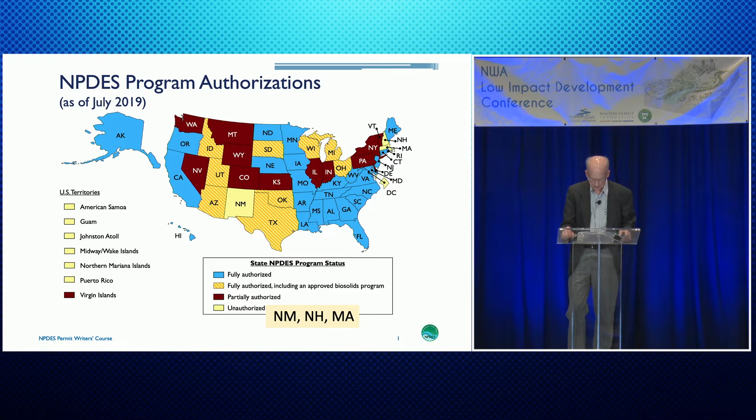Tennessee, we got our authority in late '77, as I said. Some people were ahead of us. The bulk of people were behind. I really don't know when you guys got your authorization. But the status is now that all but 3 states are authorized. Idaho is the most recent state to be authorized, and they're still in the ramp up of their transfer. And Tennessee got our authorization for the same reason that most states did, and that was to keep EPA out. It's the reason that business and municipalities wanted the states to do it, so that EPA would not implement the 402 Clean Water Program.

So here's what the MS4s in our area look like, and these are a lot of the cities that I heard you mention yesterday. Now it says Northwest Arkansas Municipal Separate Storm Sewer System. But then you see the University of Arkansas is listed down there. So even though the word is municipal, the definition is if it's owned by the government and it has a drainage system, then it's an MS4. And so in Tennessee, the University of Tennessee is an MS4. Vanderbilt University is not owned by the government. It's not an MS4. And the University of Tennessee is called a non-traditional MS4. So they've all got to have permits to discharge stormwater.

And Arkansas does that the same way every other state does, by issuance of a general permit. And think of a general permit as like an umbrella. You've got to get out of the rain. And you can either bring your own umbrella, work it out, or you can write to Arkansas and say, I intend to be covered under your permit. This is my notice of intent to be covered under the general permit that you've issued. And if they do that, Arkansas requires, as all states do, that they develop and enforce a program. They have an ordinance or authority to require them to achieve the 2 objectives we mentioned earlier: only stormwater in the storm sewer system, and that stormwater will be controlled to the maximum extent practicable. They've got to have authority to do that.

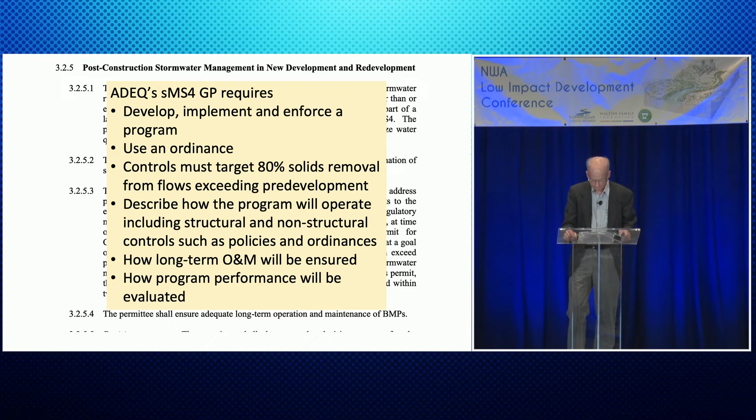If that happens, we've reversed ourselves on our commitment that we made yesterday to make friends with stormwater, to manage it in a way that it doesn't present a risk to public safety and health. And so that's where we're going. How can we do that? This slide says it's on us to do what we said that we would do.

MS4s say when they send in their stormwater management program, here's how I will do things. Almost invariably, they say, we will require property owners to maintain post-construction stormwater control measures. We're using the term SCM now instead of BMP because the B in BMP was offensive to some folks. The best, you can't make me do the best. I'll do a pretty good job, but everybody can't be the best, so we're sort of phasing out of that. But stormwater control measures have to be maintained.

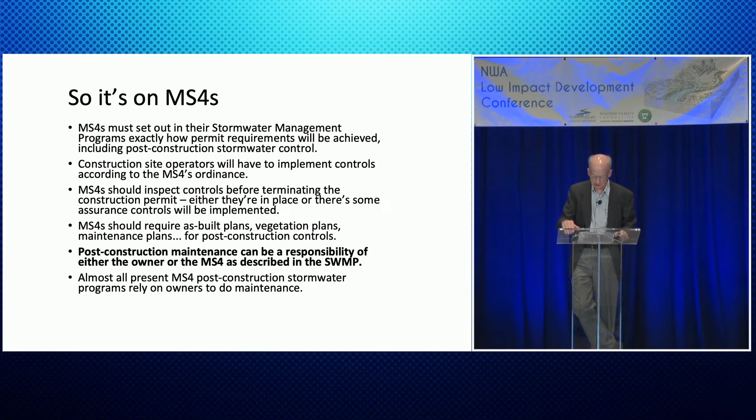MS4s say how they're going to do it, and almost invariably they say, well, we're going to have the property owner do it. The property owner is going to do inspections, and they're going to find out if they've got any problems, and they're going to fix those problems, and they're going to let us know that they've done it, and we'll put them on a list saying that that's been taken care of. This is some of the controls that we talked about yesterday, and they're the same sort of controls that we're talking about when we say how are you going to maintain these controls.

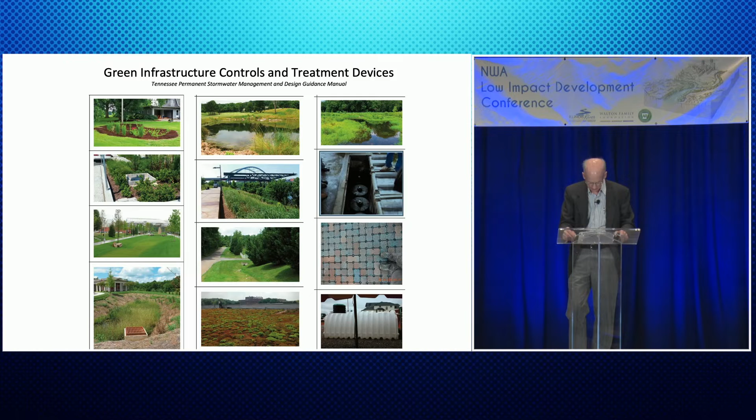Here's what Arkansas's permit looks like. And here's the post-construction control requirement, the longevity part of the post-construction control requirement. It says the permittee shall ensure adequate long-term operation and maintenance. Now, it doesn't say a whole lot more than that. I wish it did. I'd like for it to have gone a bit deeper, but it says you're going to do it. You figure it out.

So now I'm going to get into Metro Nashville. Metro, and we call it Metro. Nashville is metropolitan government, so it's all 600 and something square miles, one government. And it has what I consider to be the highest performing MS4 in Tennessee.

I mean, we have some good MS4s, but Metro, they've got a bigger staff, and their government is more environmentally friendly than other governments. And they are so because they've got 30-something people on city council. When Metro government was formed, all the little governments got to have a seat on the council. So with 30-something, there's going to be somebody that's thinking right in that bigger group. So I'm going to take a dive into how Metro does this.

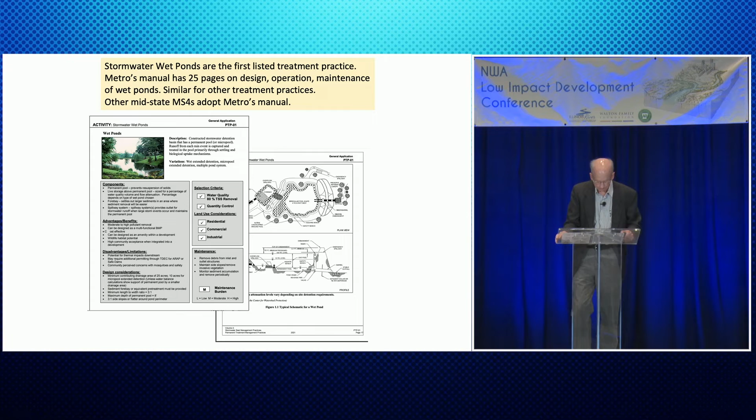And so in the manual, Metro goes down that list and says, here's the credit that we're going to give: if you put in what we've designed, you follow our design, you build it the way we told you to, this is the amount of credit we expect to give you. And so that first list is green infrastructure practices.

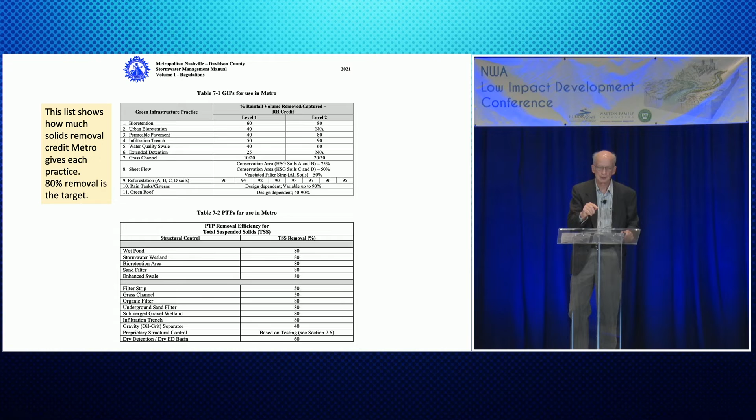We've got two levels back here in our design, the pictures. If you do level 1, we're going to say that you get 60% removal. Well, that's not enough. You can do it, but you'd have to follow it with something else. If you did 60%, and then you did 50%, engineers, tell them, what is that? 80%, is that right?

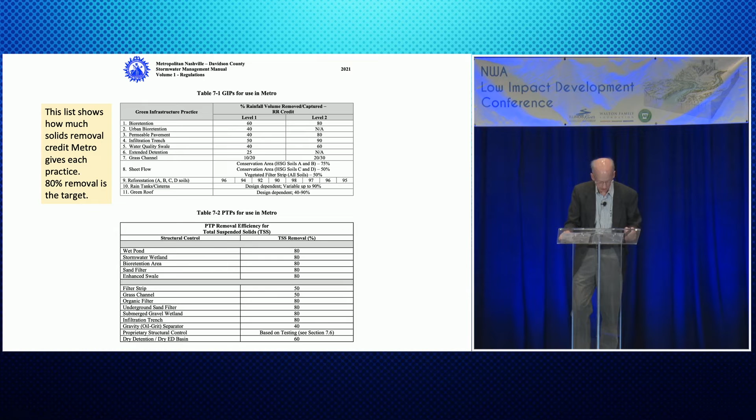And then the one below that is PTP, that stands for permanent treatment practice. So if you just go with a wet pond, you're in. You've got your 80%, and you're where you're required to be. Okay.

So Nashville requires owners to agree to long-term maintenance, and they have an owner's agreement. Every MS4 has an owner's agreement unless they've decided owners are not going to be held responsible. And here's what this one says: you've agreed, you've put your name on the line, you've agreed to long-term maintenance, continuation of measures, and you're going to send us an annual report that your stormwater control measure is still controlling stormwater.

And Nashville has over 6,000 SCMs in place. It's just kind of like Marley's ghost. You know, I wear in death the chain I forged. In life it gets longer. The longer you live, the longer that chain gets.

And Metro's got over 6,000 stormwater control measures. That's not 6,000 property owners. Some property owners may have more than one measure on their property. On the other hand, Goodlettsville, the town just north of Nashville, has a couple of dozen stormwater control measures. So it's a more finite number than what Metro has.

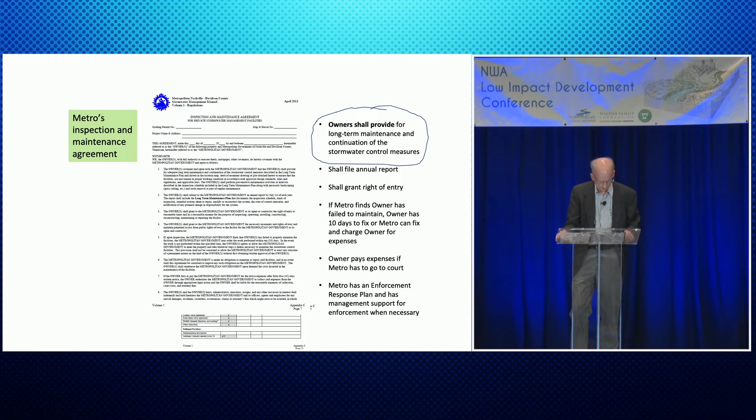They need to say super explicitly what they will do. If this is what we see, this is what we will do about it. No exceptions. And that keeps people from telling our folks who they know downtown or threatening them over potential enforcement. What else am I going to say here?

Okay, so Metro has a website. If you just type in Metro Nashville Stormwater Post Construction, all this stuff pops up. The website says the current property owner is legally responsible for inspecting and maintaining stormwater control measures. This is what almost all MS4s are doing. You're going to throw it all entirely over on the property owner.

Metro stands a better chance of being successful with that than other governments, than Mount Juliet, Tennessee. And the reason is that Metro has management that's going to allow them to do enforcement. A lot of MS4s, that's not the case. I've taught my course from New Mexico to Maine, and half of the MS4s that sit in front of me will tell me that they've not eliminated illicit discharges and they've not enforced failure to do post-construction maintenance.

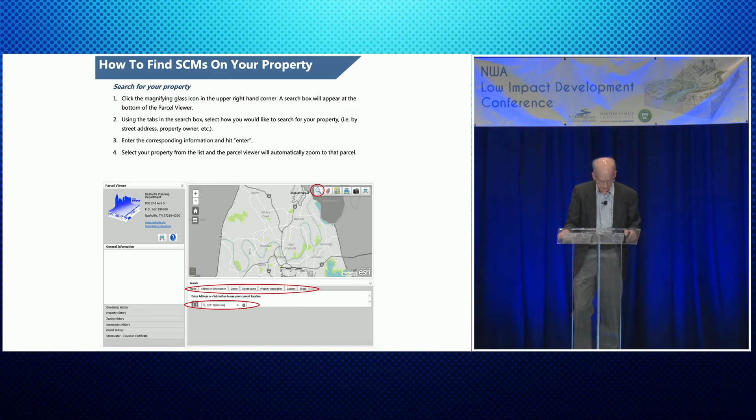Okay, so here's what you can do on Metro's site. You can find out if you have a stormwater control measure on your property. But you can also find out if your neighbor has a stormwater control measure on his or her property, or somebody in your neighborhood has one. And by drilling down this set of web locations, you can get some information on what that thing is supposed to look like.

What's it supposed to be? And some meddlesome geriatric might be driving through and say, you know what? I see the picture of how it was when it was functional, but now it doesn't look like that. And so I want to know what you're going to do about it.

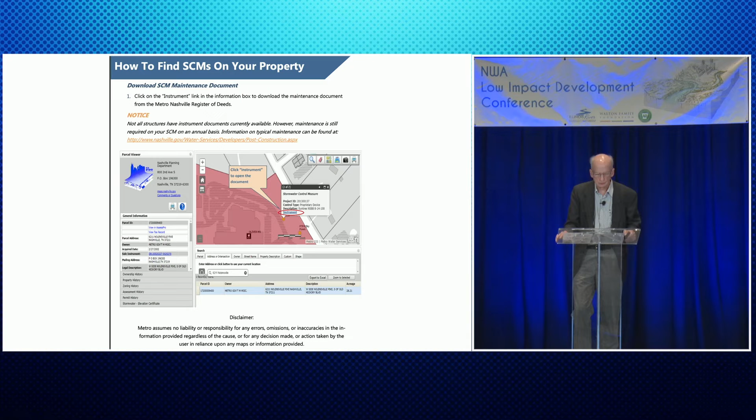Here's some detail. And so if an MS4 is going to leave the responsibility on the property owners, they need a system like this so that the MS4 itself, but also the general public, will know: in order for stormwater to be controlled, in order for pollutants to be removed, and in order for flood risk to be addressed, all of these controls have to be working. If they're not all working, then we're not managing flood risk. We're seeing the flood risk that we saw here in photos yesterday.

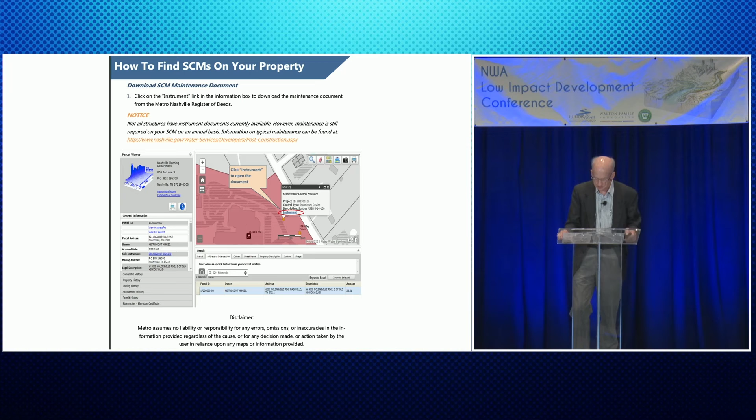And so your MS4, or the MS4 that you're associated with, or your client MS4, really needs to be looking this far out and making all this information available so that the owner or anyone can get details on how the site is supposed to be. Let me turn this on.

Okay, I think I said Metro has over 6,000 of these things. This is the report that they expect to get in. This is their annual inspection and maintenance report. So they expect to get 6,000 of these every year. Metro has how many FTEs on post-construction? What do you think? 5 FTEs on post-construction in Nashville.

And the woman in charge of that program says, here's what I do. She says, I've got 6,000 of these that are supposed to come in. 3,000 are going to come in on time. I set them in a pile. I never fool with them again. That leaves me 3,000. I send them a warning letter. Half of those are going to come in. I put them in the same pile. The 25% who were late the first time, late on the second round, that's where I do my inspections. And that's where I send the inspectors out.

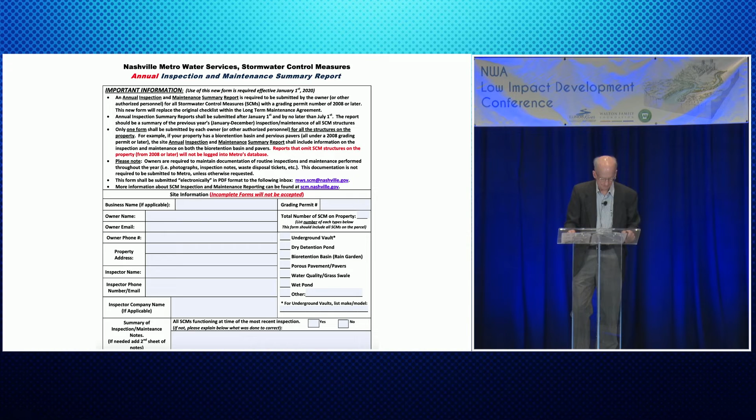And then they've gone through and identified contractors who have asked to be on the list. Now, Metro hadn't certified, hadn't done training for these contractors. If you say you are a contractor and that you'll provide these services, you'll be on the list. But this is on the website. So some of the maintenance that's required would be easily dealt with by a homeowner. Some of that maintenance requires some skills or equipment that the homeowner may not have, and so they would need to get in touch with one of these contractors.

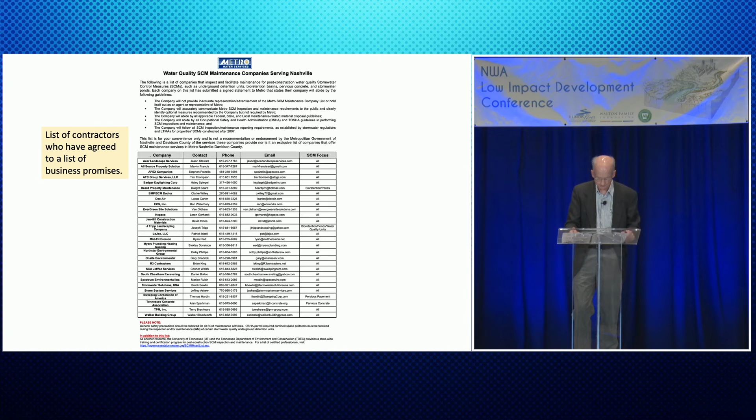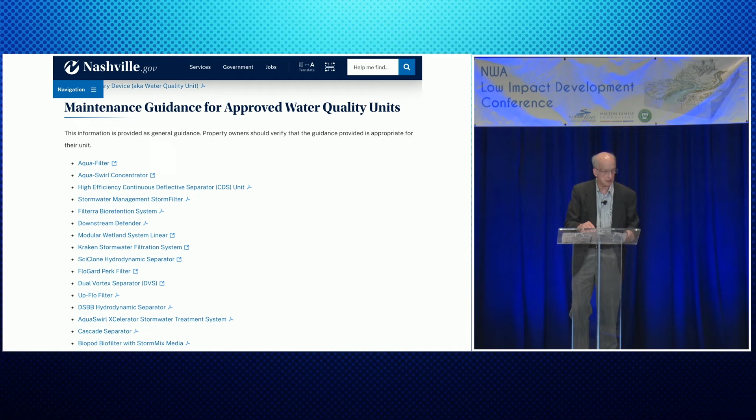Here are the approved proprietary devices that can be put in place, and there's a contact listed for every single one of these. Here's the maintenance guide for all of those devices. We've got a maintenance guide. Every one of these things, there's Aqua-Filter at the top of this list. Here's Aqua-Filter. Every one of these will hyperlink out to here's how you maintain the device that's in your yard.

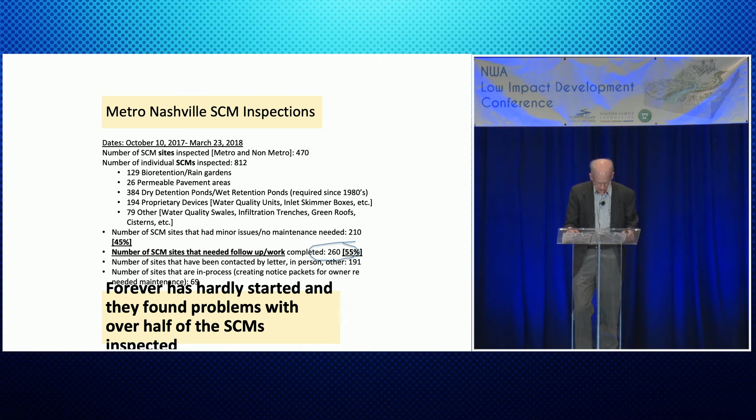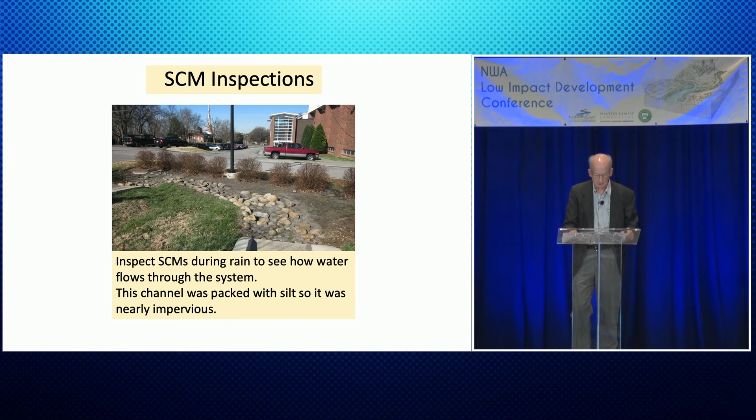So they took some pictures. This is an infiltration that's supposed to happen here, but it's played out because clay has settled on it, and it's nearly impervious now. This is probably beyond the capability of the property owner to fix. Here's bioretention. It says curb inlets have eroded because of improper sizing, so that may be beyond the capacity of that property owner. High plant mortality.

You know, I was talking to somebody yesterday about the importance, you either know your plants or you don't. And if you go to Lowe's or Home Depot 12 months a year and you say, is it a good day to plant grass seed? It's a great day to plant grass seed. You may as well go to McDonald's and ask if it's a good day to buy a hamburger. It's going to be a good day.

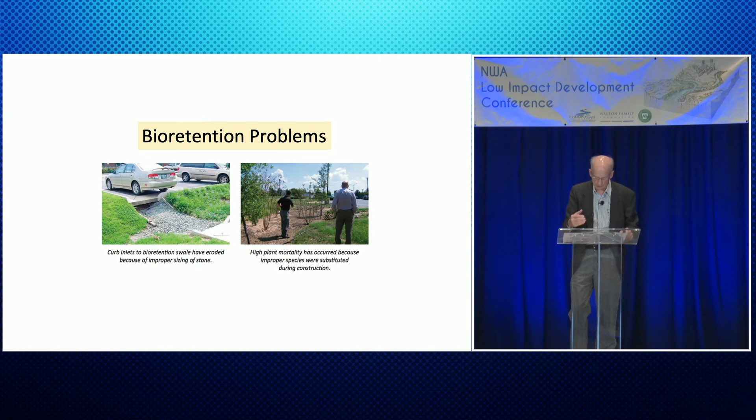But that's not the case, and we find a lot of plants just don't. They look great on the shelf, but they don't make it in the field. And so those are issues perhaps beyond the capacity of the homeowner or business owner to fix.

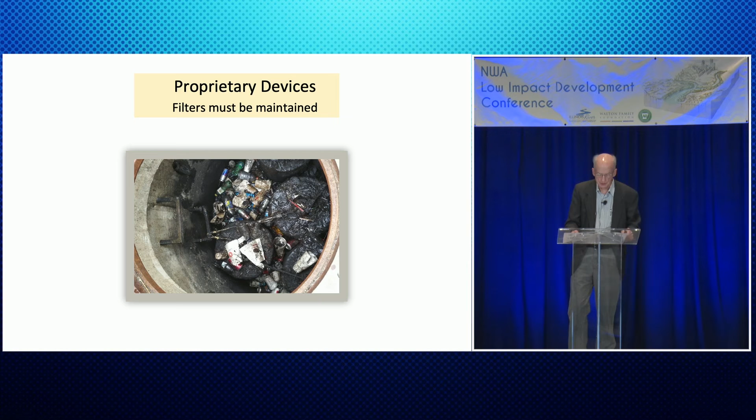Proprietary devices, they've got to be maintained. Filters work well for a while, and then they've got to be maintained. And does the property owner know how to do that? Well, they might know how to do it. Are they inclined to do it? Well, not in this case.

And my favorite, this is a bioretention area, but this is at a condo. At the time this picture was taken, I won't identify this person, but the condo is owned by the kicker on the Tennessee Titans football team. He's got a house someplace else, but he's got a condo in town for when the Titans are in town. And he decides he wants a hot tub, and he puts it right on top of the bioretention area there, which has got to make it less functional, right?

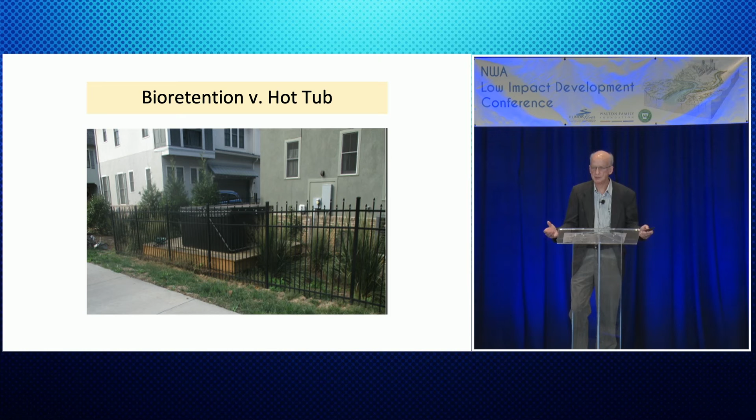Where am I on my notes?

So looking back, the property owner responsible program is what Metro has. It's what almost all MS4s in Tennessee have. It says we're going to have an enforceable agreement, we have an owner's manual, we're going to do training, we've got tracking, we've got support. I mean, really, they've gone over. It seems to me hard to argue, well, how the hell did I know what I was supposed to do? Because we put it all out there for you.

They send out very pleasant young staff folks that get along with people better than cynical geriatrics do. And they've done everything they could. They've got owner support. They've identified who the helpers could be. That's one option. But my note says, even the best of these are only partially effective.

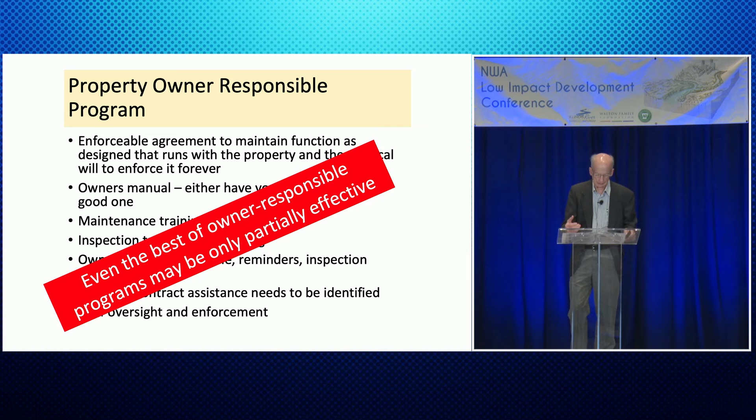Metro, as good as their program is, they figured that 55% had problems. Had they not gone out to see those sites, those 55% would be dysfunctional. That's a lot of stormwater management not happening. And so I've gotten concerned about that and am suggesting to MS4s that they consider some mix or some hybrid,

perhaps all the way to MS4 responsible. And there's a small town outside Metro that just says, we're going to do it all. We're going to do this all ourselves. We've got a stormwater utility.

A stormwater utility is, I hope you guys all have stormwater utilities, a way to fund the stormwater program based on monthly fees from what's called an ERU, equivalent residential unit. And those fees go anywhere from a little over $1 a month in San Antonio to $13 a month in Chattanooga. They're not expensive. They're as reasonable as charging people for their water or their electricity, trash pickup, newspaper delivery. That's a service that the city is providing you.

Now, you don't have to pay for that service if you don't want to. If you want to pick up your stormwater yourself and get rid of it yourself, you can. You can put a moat all the way around your place. But you're not going to be able to do it for $1 a month or $13 a month. And a lot of MS4s allow the property owner to offset or reduce that cost if they put in some extra stormwater control measures that weren't already required.

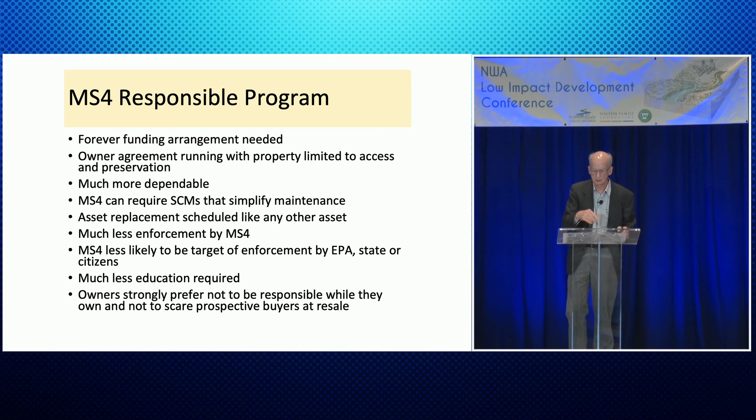And there's what this slide says. How much more does it really cost? You know, when I bring this up to MS4s, they say, oh man, that's going to cost us a lot. Michael, my friend at Metro, says he might send his staff out there 3 or 4 times. If he has to do enforcement, there's a cost associated with that.

And then at the heart of it, I said, well, okay, Michael, you like property owner responsible. What happens when somebody's property gets flooded and they go to counsel and they say, Mr. Attorney or Ms. Attorney, my property was flooded. I want you to find out whose fault it was, because it couldn't possibly have been my fault. And that person goes and picks up Metro's annual report and says, over half the stormwater control measures are dysfunctional. Well, that must be the reason your house flooded.

Your Honor, the reason the house flooded was because the stormwater control measures weren't being ensured as the permit requires. State law requires it. Federal law requires it. You're in the business of enforcing state and federal law.

So, my last line on here is one round of bad politics. You know, you can have a local government that's all over environmental protection, but the next election comes in and that person comes to the stormwater manager and says, I hate you.

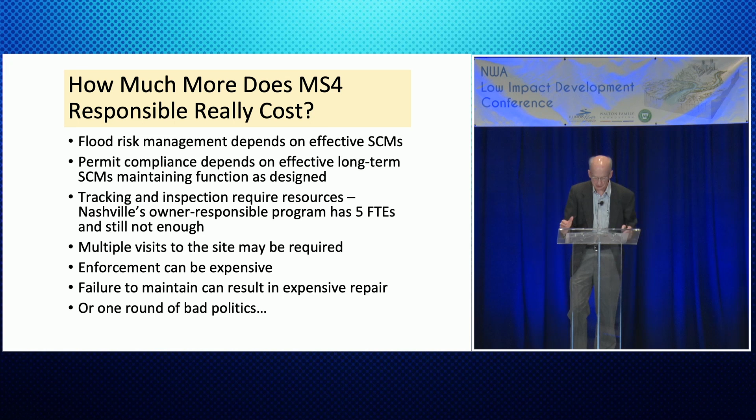And so here's the suggestion that I'm going to leave you with. MS4s should fully consider the costs and benefits of both alternatives. And I told Morgan if I were redoing this, I wouldn't use the word both. I would use a word like all, because there's a mix. You might say, well, the MS4 is going to do the initial inspection and the property owner will do the fix. Or you can hybridize this however makes sense.

But what I don't want us to do anymore is for the MS4 to say, okay, let's get a property owner's agreement off the website and put our name in where it says MS4, and let's get everybody to sign it. That's just as thoughtless as it is to say, okay, you bring me the topo, draw 360 degrees of silt fence, and let's get started. Silt fence is not always the best answer. We know that now. But you're still seeing silt fence 360 degrees around the perimeter of the site. Why is that?

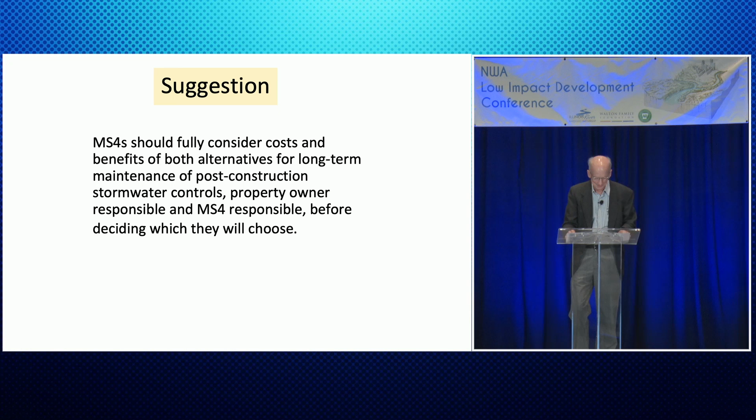We have engineers sending in SWPPPs that have never been to the site. And I don't know them because they don't come to the professional meetings. They're busy sending in more plans. All right, so that's my suggestion, and it's part of our answer to, in 10 years, what would we wish we had done to protect the Illinois River.

So let me stop there and take questions or get arguments, which I love to get. Hear somebody else's experience. How much time do we have? We've got time for a couple questions. Any?

I have one for you. So you've got 6,000 control features in place, and 55% of them are not functioning properly. Has the metro area done any kind of network analysis to try to link these into an overall effectiveness in terms of stormwater controls?

Well, the best way to do that would, of course, be to measure, but I don't know that they've been able to do it by measuring streams and saying, well, we've got this many controls, and we can see that the water's a little bit higher or a little bit lower than it would otherwise have been. That's the thing. It's the tragedy of the commons.